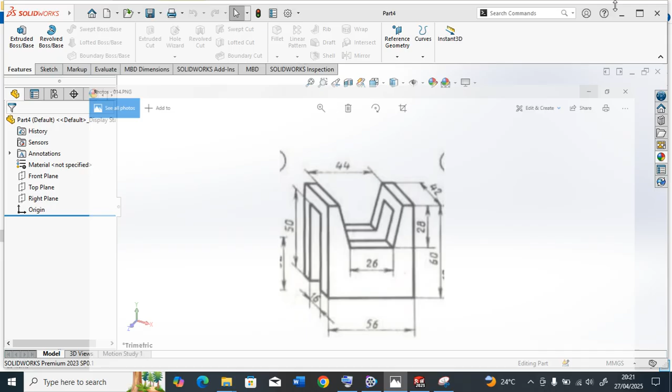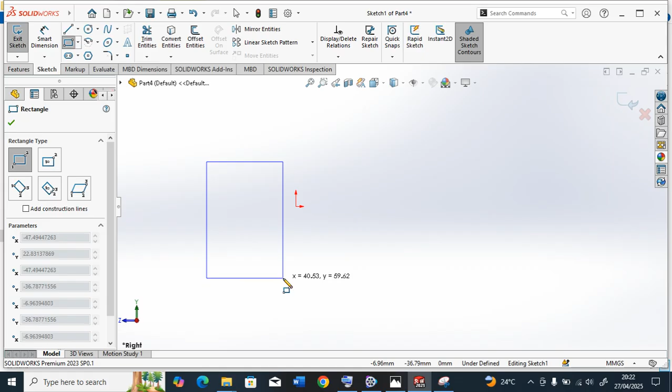Then we take the right plane and we will use extrude and come to sketch. Here is 56. Six.

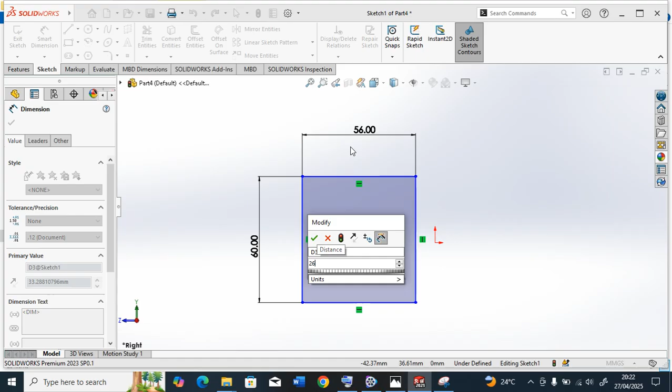Then this is 26. Here to here is 28. 28.

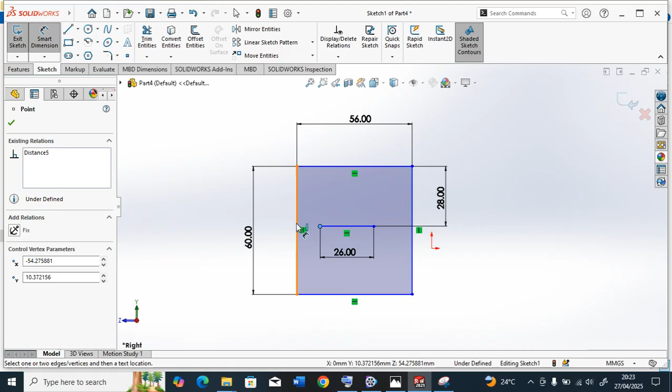To have the center, here is 15, 15, because this minus this over 2, which is 15. So from here to here is 15. Take the line from here to here.

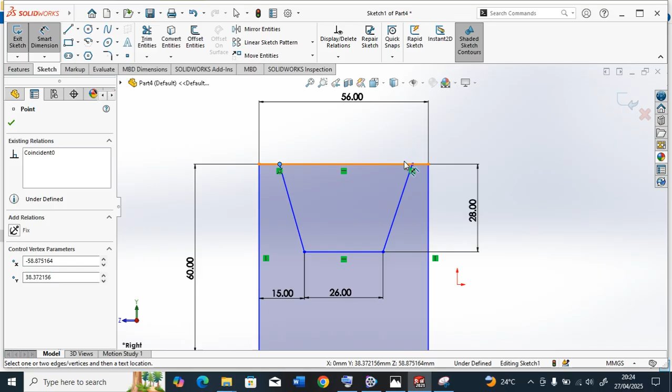The dimension from here to here is 44. So from this to this is 6, 6. Okay.

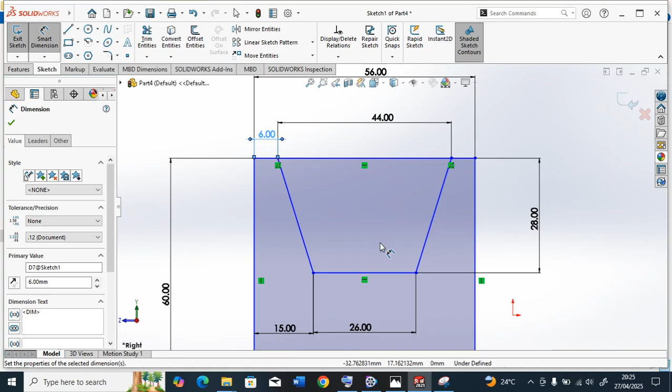So then I go to trim entities. I will trim this. Now we have the shape here. So we are going to extrude this by 42.

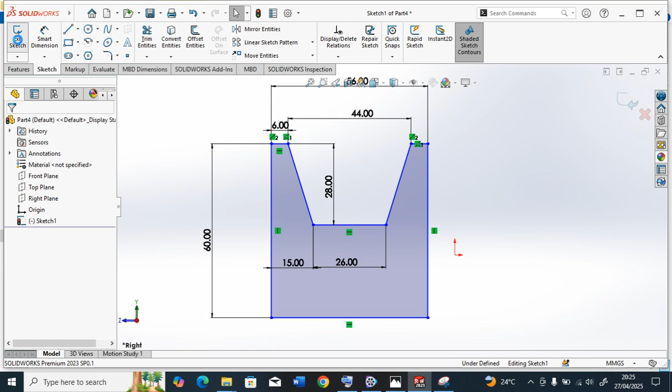Okay. Copy the sketch. Extrude the base by 42. We have this shape here.

Then we're going to cut a hole here. This hole which is 50. Here is 42 minus 16 divided

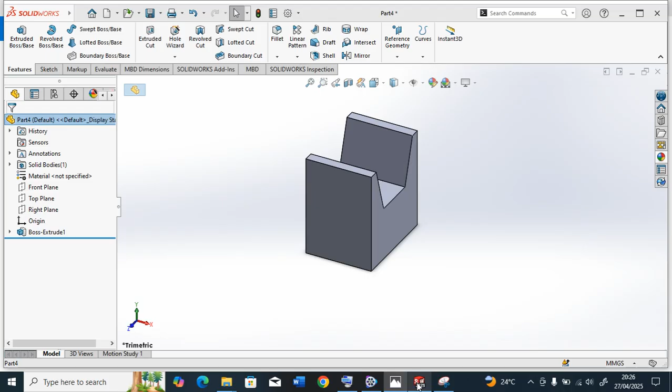26. 26 divided by 2, we get 13, and here is 13. But here is 50, here is 16. So here we click this surface, we have to cut and draw the sketch to be cut, which is from here.

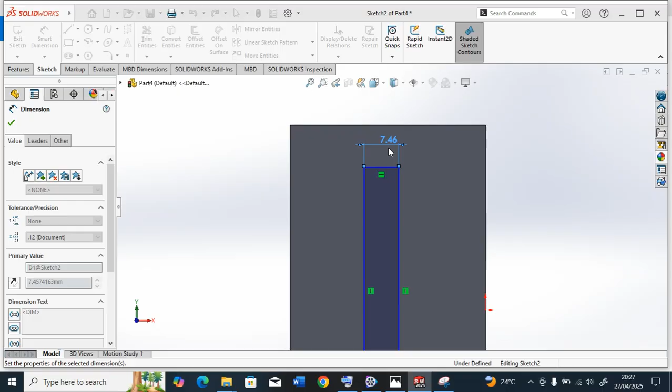Dimension. Here it is 16. Here is 50. And from here to here it is 13.

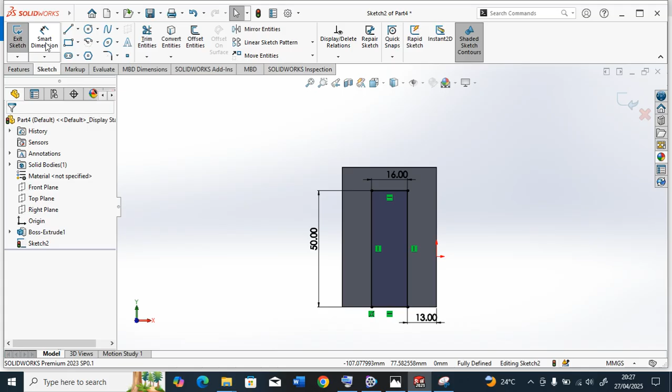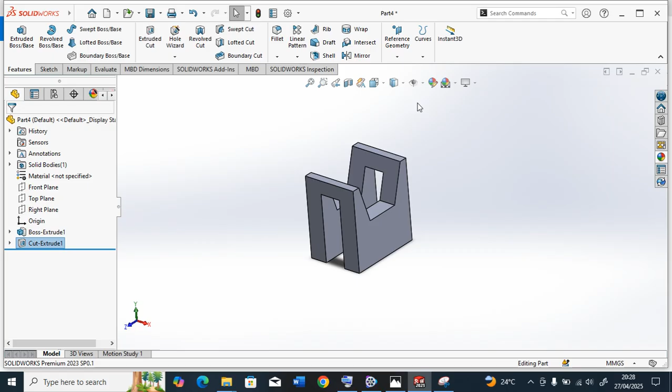Okay, 13. So after finishing, we'll take the sketch, then extrude cut through all. Then click OK. Yes.

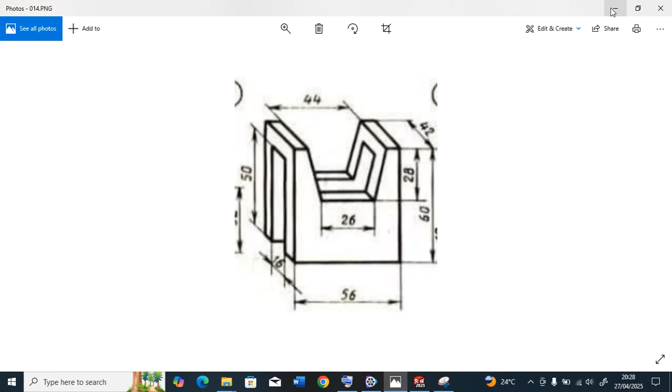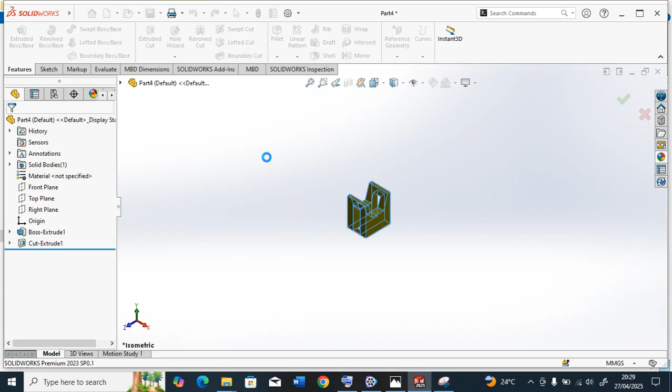You can change the color now. Edit the appearance and change the color. Okay. Then save the part. Save.